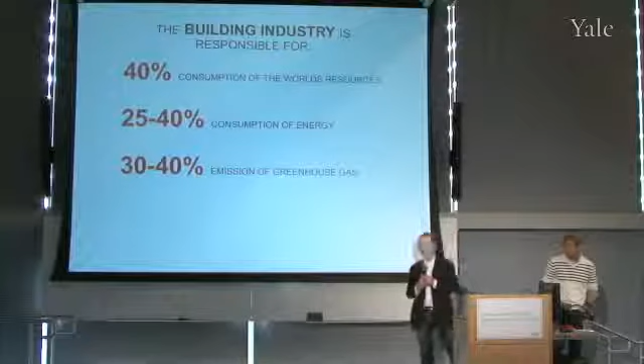So for this one here, 25 to 40% of the consumption of energy on the planet is from the construction industry, from the building industry itself. 30 to 40% of the emission of greenhouse gases is from construction. And 30 to 40% of solid waste generation.

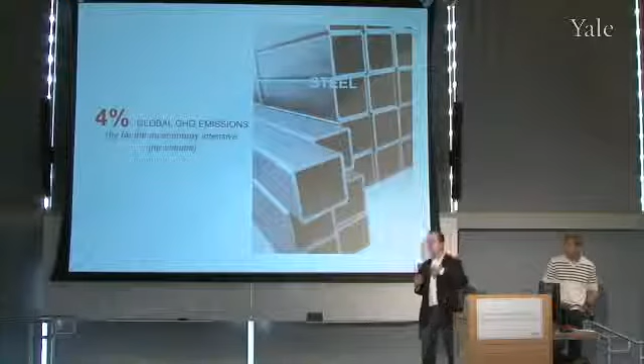Now, as we stand, the building industry itself principally uses concrete and steel for these buildings. Concrete itself is responsible for between 5 and 8% of global greenhouse gas emissions. So that makes it the fourth single biggest emitter of greenhouse gases. Steel for 4%. So per volume, in terms of the construction industry, the biggest emitter of greenhouse gases.

Now, this is compared, importantly, to airline travel, 1.6%, shipping 3%, and again, concrete 5%. So if you build in timber, you can fly where you like.

Get used to my humor.

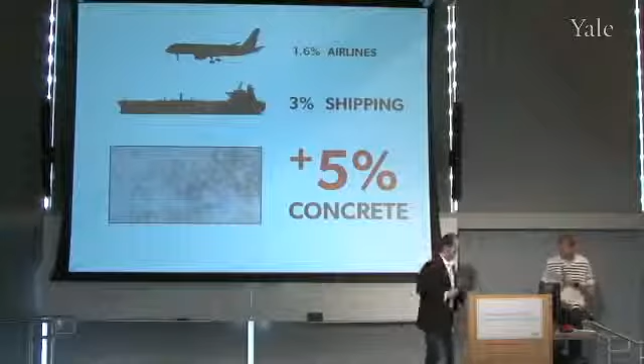So now we're going to switch over, and I guess this really is the essence of how both of us came to this discussion. I come from BC, where it's obviously a big timber industry, so it's an important discussion in my community. But my interest as an architect, and Andrew's interest certainly, is around the issue of climate change, around the issue of environmental footprint of the buildings we build, and looking for a new responsible way.

So much like Andrew suggested, the fact that the world is urbanizing at this extraordinary rate means that we need to not look at solutions that are rural or suburban scale, which much of the architecture industry has been looking at for a long time, of greener solutions. We really need to look at the big buildings we make. And again, the bones of those big buildings is really where we found we need to start from square one.

So effectively, in all those statistics, and to go one step further on the stats that Andrew just talked about, here in the United States, almost 50% of greenhouse gas emissions are related to the building industry, and almost 50% of energy is related to the making and manufacturing and operating of buildings. So those numbers are actually slightly skewed down worldwide as they are here in North America.

They're even more extraordinary. So obviously to us, the reality is that big problems equals big opportunities equals big solutions, and that's really why we've sort of stepped into the fray of very, very large kind of systemic change discussions about how we build in urban buildings.

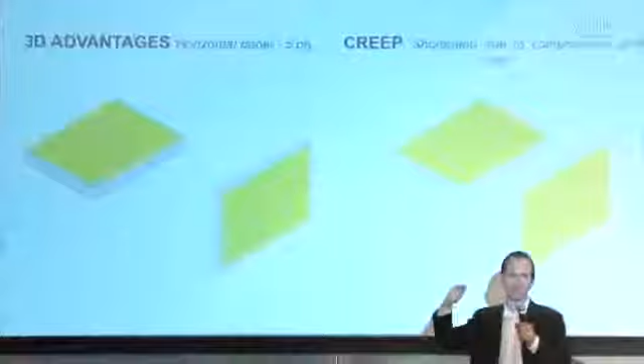So cross-laminated timber has the advantages of like a jumbo plywood, if you like, has the advantages of acting as a beam, that a wall will act as a beam. So the walls are carrying the load from across the length of the wall, and the floor slab will work in both directions. So you have the primary timbers on top and below, and that's your primary load path. And then the timbers in the middle will give you a secondary load path, which makes your slab stiff across the width.

In terms of moisture and stability, again, they're very stable materials. So we had a terrible thing happen about last summer, the end of last summer. It reached the dizzy heights of about 75 degrees in London, and we had one of the cladding panels pop off the building and fall onto the sidewalk. I want to say narrowly missing a baby, but that's not the case. So of course the developer phones me up on the weekend, running down there, and everybody's like, well, this is just because of the timber system, because of your timber structure.

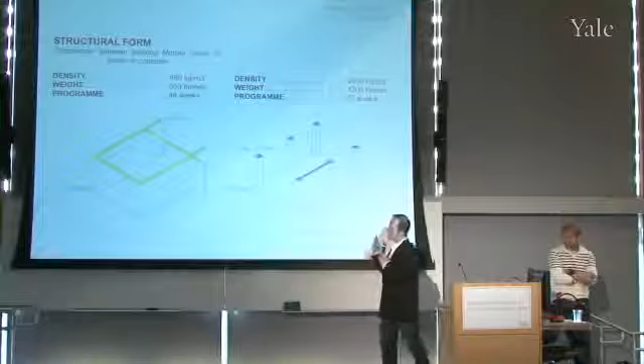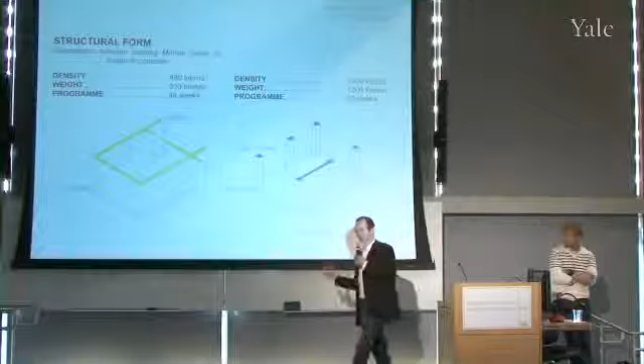So the sketch that we show our clients, that we discuss with the clients that come in, is to talk about this building instead of a slab and column building, such as you build in concrete, to talk about a panelized system, and that the weight of this building is a quarter of the weight of concrete. So that's the first thing we sit down and we say, look, if we're building a building that's a quarter of the weight of concrete, we don't need a tower crane. We can do the whole thing from the back of a truck with a mobile crane. We need about a third of the amount of foundations on this building.

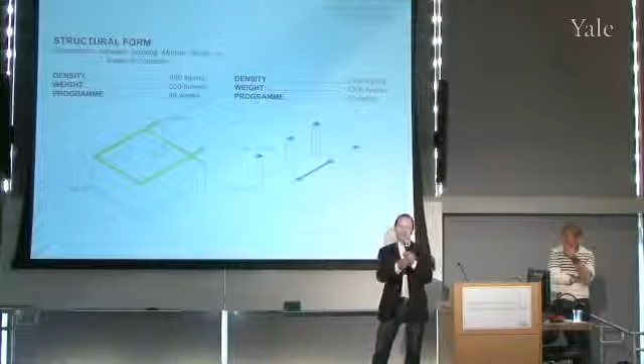And also, it's fast. It's a very accurate, very easy material to work with, and very, very fast. So we did a comparative program for the client, showing them a concrete frame building going up in about 18 months, and the equivalent timber building going up in less than a year. And in fact, from when we started demolition to when the first people moved in was 11 months.

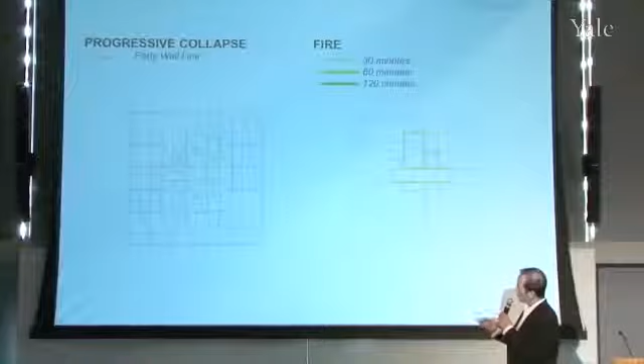So these are bedroom walls. And you can see this is the party wall in this situation. So this is one apartment, two, and this is a big 4-bed apartment here. So you can see how they're separated there. So we're able to move these party walls across the structure, giving us that varied plan, which allows us to change the building as it goes up. So we've got 5 different floor plans on 9 floors.

So in terms of fire, the way that it works in the UK is we have a system of compartmentation, which is where we separate out the apartments from each other by having a 1-hour fire separation between each apartment, and then a 2-hour fire separation on the lobby and the elevator shaft. So the idea is that if there's a fire in this apartment here, then this apartment's got an hour to finish watching what they're looking at on TV, and then to leave.

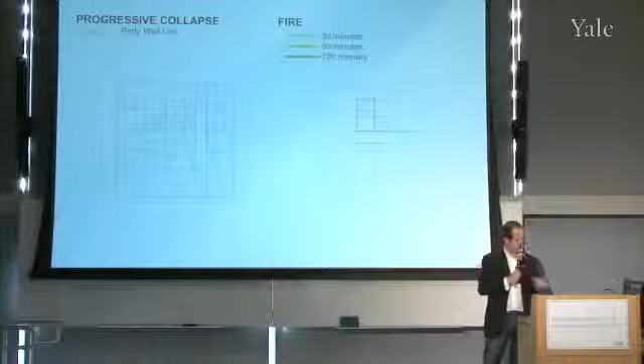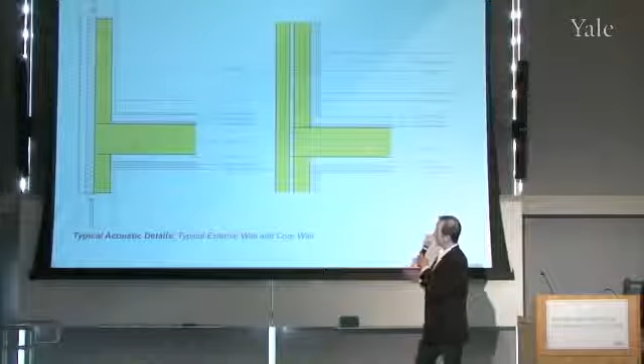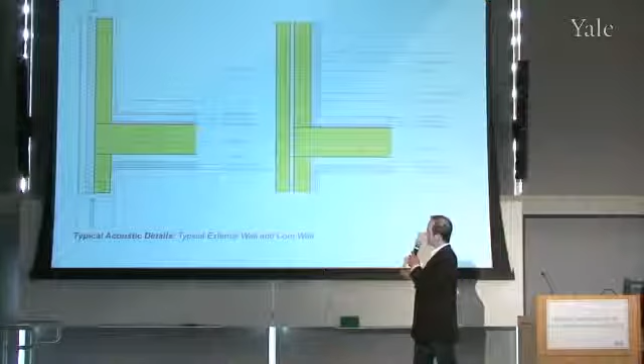So just in quick terms, I'm doing this quite quickly so I can give Michael some time to talk about the work that he's been doing. But this is a section through our building here. So this is the floor slab, which is a 6-inch timber slab, and then 5 inches for the walls here. And then we have an acoustic insulation that goes and wraps up the end there. And we have a screed on top, and that's for an acoustic separation, but also gives us a thermal mass as well. So we're able to put underfloor heating in this screed here. And then we have a void, insulation, and plasterboard below here.

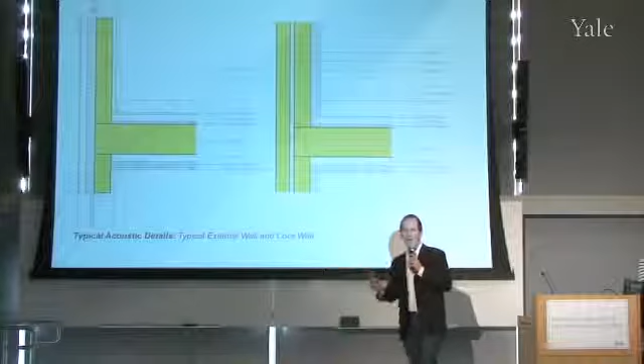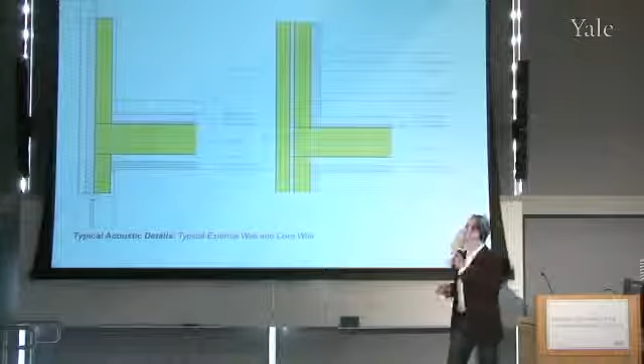On the outside of the building here, we have a breather membrane. What do you call that, like a Tyvek kind of stuff? So yeah, breather membrane. So a breather membrane on the outside of the building, and then we run a rail system down that, and we push the insulation on top of that, and then we have a simple rain screen cladding system on the outside, which is made from a wood pulp and cementitious tile. So very simple construction method. Hi, yeah.

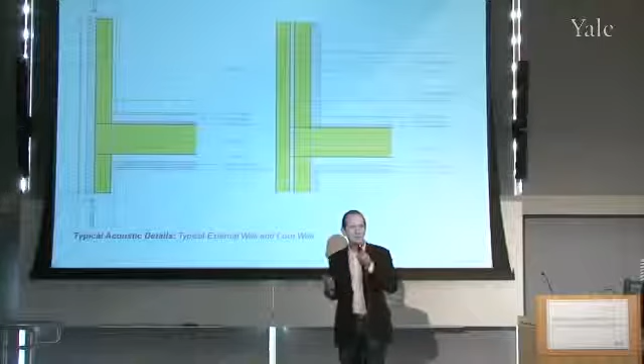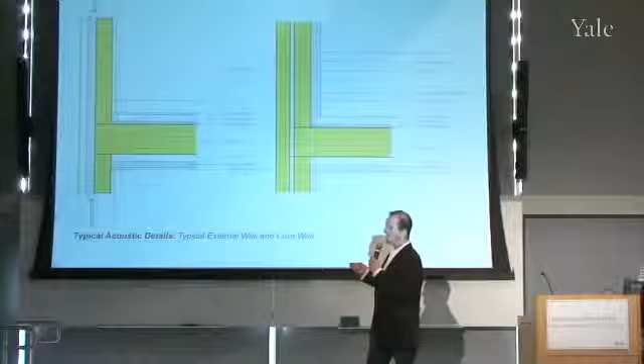That's it. That's not schematic. That's a construction drawing painted green. It's a platform construction. So the wall panels sit on the edge of the floor panels. But there's angles there, right? There's a little angle bracket that sits there, and then in localized positions we've got some screws that sit underneath the wall panel here, just for compression, for creep on the edge of the slab.

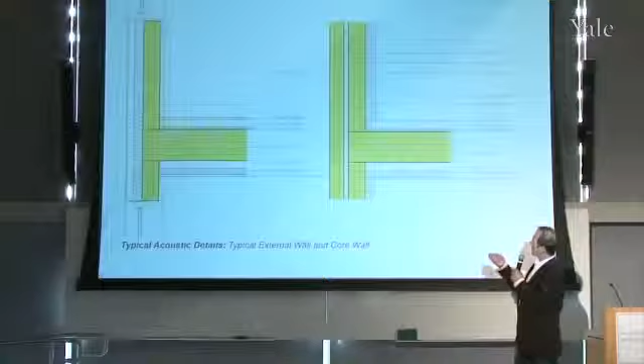But really, the whole principle was to make sure that the building was incredibly simple. The idea was always to get the building built. So to make sure that the building was very simple, so that there were no complications for the contractor, no excuses for the contractor to say, oh, it's just far too difficult a thing to do. So we made it very, very simple. You can see this is a section here through the lift shaft. So we have a separate panel here for the lift shaft, and these are the internal walls up against there. So you have just a 40 mil, a sort of 1.5" separation between the two.

So this should explain it. This is a better idea here. So this is the construction process. So this is our ground floor concrete slab. This is London here. This is my office over there. This is beautiful, isn't it?

So the process of construction was that on a Tuesday morning, a truck arrived with 4 Austrian carpenters and some panels on the back. And then on a Wednesday, another truck arrived. On a Thursday, another truck arrived. And on a Thursday night, they went home to Austria and were tucked up in bed. So they built a story in 3 days, Tuesday, Wednesday, Thursday, and they built a story a week. So in 27 work days, we built 9 stories. And you can see no scaffolding here. And that's the finished result. Can I just play it once more?

Is there any bracing needed during each level? No. Progress up in height? No. Bracing for stability or for shear? No, because all the walls are working. So all the shear forces, all the P delta forces, if you like, pass through the slabs, pass through the front elevation and down. Does that make sense? Because the connections run along the length of each one of the wall panels. So as you progress with the walls, you're starting from corner to the end of the next corner?

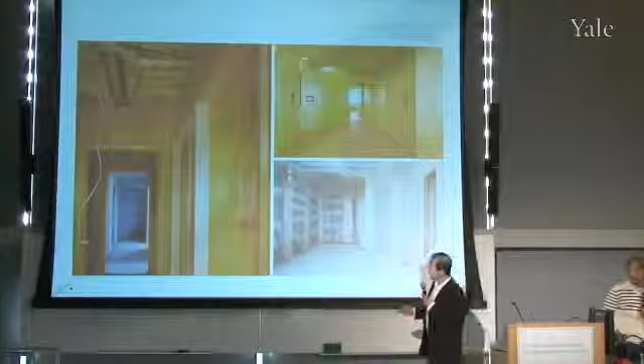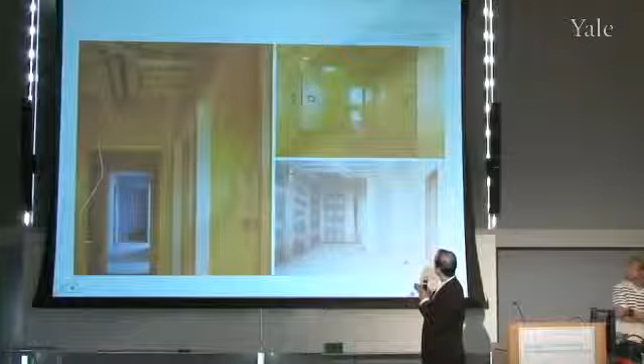So this is some of the construction here. You can see this is the first fix here running through for the electrics and for the gas lines. And you can see here the connections that we're talking about. So the whole building is put together using 3-inch galvanized brackets at 18-inch centers with 4-inch screws. So that's 3 guys with cordless screwdrivers and 1 guy driving the crane.

The discussion that we had with our developer client about the building was that when we sat him down and we explained to him the environmental and sustainable benefits of building this building in timber, he said, the thing is, Andrew, I don't give a monkeys for the environment. I'm not interested. You're going to have to sell this to me in a completely different way. So we sold it to him on the basis of speed and efficiency and cost.

We were cost equivalent to concrete, but we were 6 months quicker. So he said, okay, well, that's fine. We can go with a timber system, but I don't want anybody living in this building to know that this is a timber building because I'm worried that they won't buy it. If they think this is some kind of sustainable exercise, then they're not going to touch the building at all. So we said, okay, fine. We just want to build the building.

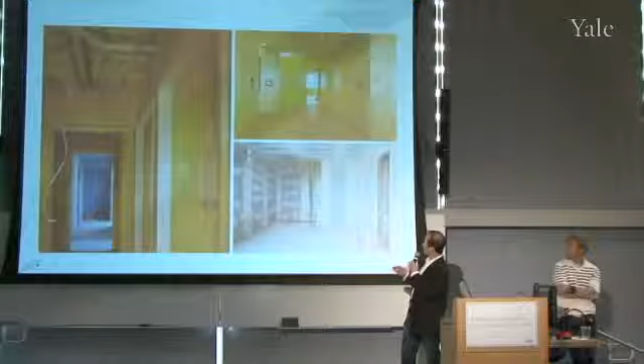So we covered the interior of the building with gyprock here, which at the time, when you've got the sauna sort of stage here, and then you go to this, it's a little bit heartbreaking. But actually, I think that in hindsight, what this has done is to strengthen our argument in terms of proving a viable alternative to concrete and steel. Because the viability of this building has not been about the aesthetic, it's been about the structure and the efficiency of the construction process. So that's actually worked very well in terms of being able to talk about timber as an alternative, using this building as an example.

So you can see here, this is during the construction process, and this is the end of the job. So we have here an inboard balcony, no cold bridging issues. We've got torch-applied felt on the balconies. So I came onto the building site, and you've got some Polish bloke sitting on the corner there with a blowtorch in a timber building, putting the felt on, which is a bit of a heart-stopping moment. So there we go, finished product.

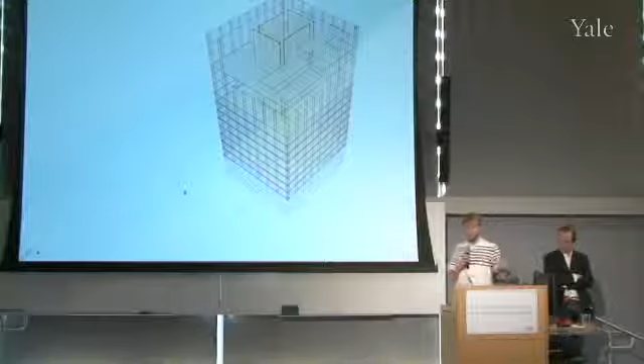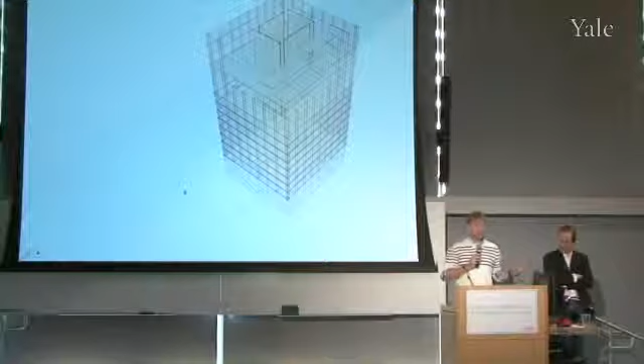We designed it very specifically around Vancouver, and we decided that our report needed to demonstrate that this was rigorous from a technical point of view, but also rigorous enough to show that it was cost effective and tell the story why consumers would want to buy it, why developers would want to do it, how people would ultimately market these ideas, and also obviously the other critical parts of how they worked and what their sustainable story really would be.

So in Vancouver, where I live, it's a high earthquake zone. We wanted to really challenge our system by proposing it in the highest earthquake zone in Canada, and also proposing it in a dense urban environment and really work with contractors to understand how we would actually technically build something on that scale.

So the system's actually remarkably simple. The first version of this I built with my son when he was 6, and we sat down on the ground together and put it together. Sometimes the best ideas are just that easy. And I work with some outstanding world-class wood engineers in Vancouver. I'm lucky. I come from a wood culture, and there's some outstanding wood engineers.

I've worked with the engineers of this building in New York, and my engineers in Vancouver actually have been helping the New York firm understand wood a little more. We have a great culture for wood. And when I pulled them aside, I said, guys, my son Macalo and I have been making this, and I really think this is interesting, and this has some real potential to build big, and what do you guys think?

And they sort of said, yeah, this actually works, and we started working on it more and more over the last 5 years until we reached this point where we realized that it's not only possible, it's actually really practical to do this, and it's shaken things up a little bit in the big conversation worldwide.

Because this just came out 2 weeks ago publicly, it's kind of an interesting moment for me personally and for our firm, because we spoke to CNN a week ago, and we're talking to Bulgarian newspapers, and some guy from Iraq contacted me about how to do this. So it's become a very quick and very instant conversation because it seems so different.

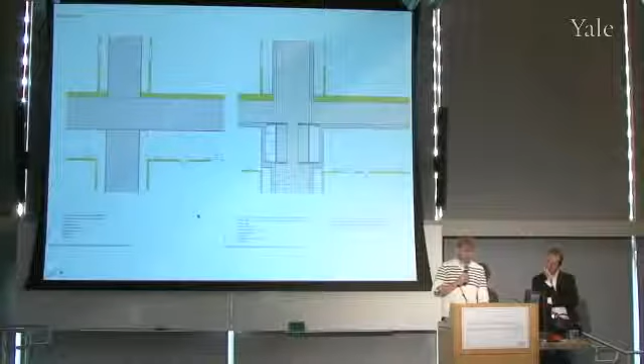So again, without going into any detail, what I just want to point out is throughout our study, what we were able to do is compare concrete to steel, to wood, constantly back and forth, show how they worked acoustically, show how they worked in fire, show how they worked from a building envelope point of view. And our study is filled with millions of these diagrams to really help articulate it. And one of the things that almost became a surprise to many people is that in concrete, a lot of the time we had thicker slabs or thicker walls than we would for the same building of the same height in wood.

And the reason is quite simple. Andrew touched on it. A wood building is 1/4 to 1/6 the weight of a concrete building. So when you're building in a high earthquake zone and you build in concrete, as you go higher and higher, the mass of the building becomes very great. And the forces that you're trying to resist are very, very great because the building itself is so heavy. When you do it in wood, you're actually resisting less force.

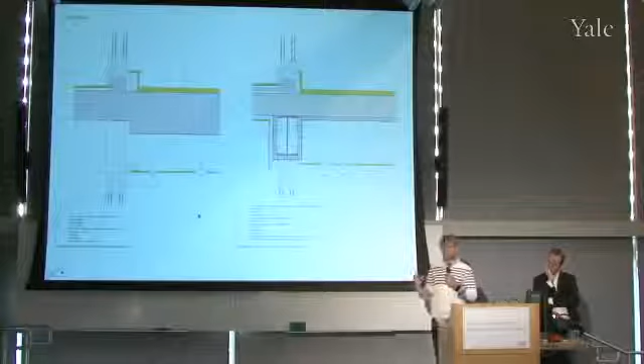And what we found in a building that's 12 stories tall, in Vancouver, you would typically see the concrete walls around the elevator shafts be 1 foot thick. And in wood, they were only 9.5 inches thick. So it was almost a huge surprise to us that wood actually resulted in more floor space and a more simple system. So again, we went through systems and how they were integrated, and we went through all the different conditions of balconies. We don't need to spend too much time.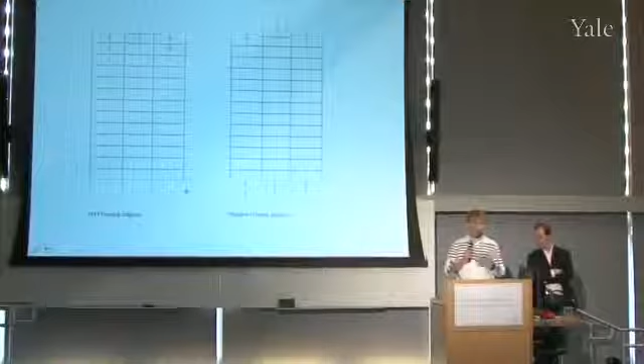And we wanted to check the boxes of the standard challenges. Currently, no building code has imagined these systems, so certainly the code is a big one, but really the issues are kind of consistent. Wood shrinks, and that's true, but when you build a very tall building, as wood shrinks as it dries out, the problem is you can have real technical problems with how that building goes together. In our system, if we built it on the right, the platform-based system where you build up to a certain height and then put a floor in, build up and put a floor in, it would actually result in adding up the floor slabs.

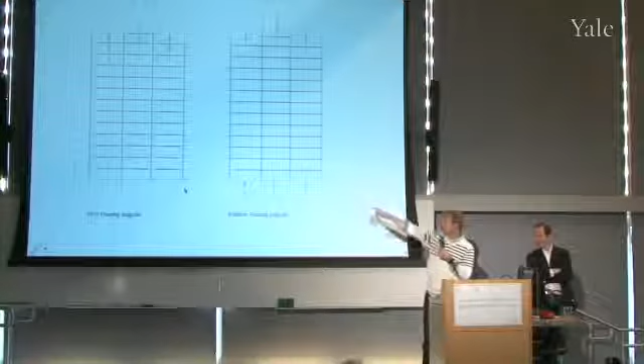And as you get very tall, that actually deals with a bit of shrinkage, although Andrew saw very little in his building at 9 stories. Once you're at 20 or 30, that can become a bigger issue. So what we've been working on is a system where the floors actually sit in between and we don't absorb the shrinkage. And so it's really effective. In fact, it shrinks about the same amount as any concrete building would. So that solves some technical problems.

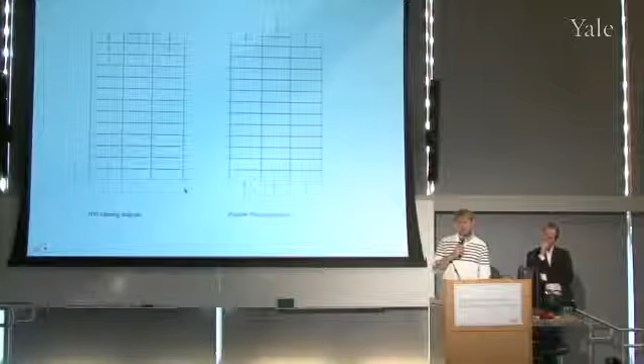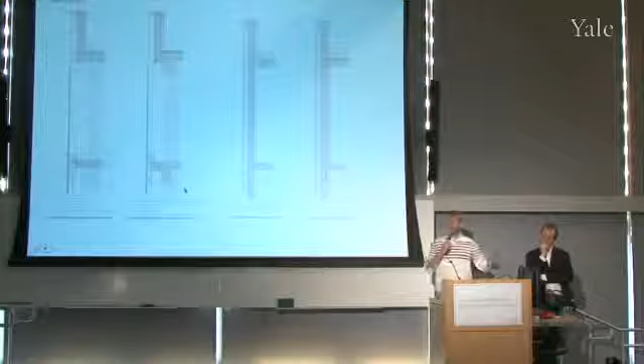I'm just going to keep going a little quicker now. So from a moisture point of view, just like in Murray Grove, in Andrew's project, we don't put the wood structure out there for the weather to beat it up. There's always an envelope that protects it, and that's a really important thing. I'm slowly learning all the issues that are the buzzwords for the public that write underneath the CNN article, all of their kind of concerns and complaints, and they're good comments. They're very standard comments, but there's also a lot that's just misunderstood, and there's no intention to build these things and have them sit out in the weather and rot and be exposed to termites and so forth. Those things are all taken care of.

Acoustics is the biggest issue. Probably the hardest issue of all the things we dealt with is just that in a big building, the mass of the concrete actually is very effective at dealing with acoustic issues between suites in a building. And getting these buildings to work is very possible, but it also requires some pretty sophisticated detailing.

And from a fire point of view, and Andrew touched on this a little bit, we have two systems. Big, tall buildings in North America have to resist a 2-hour fire. And what that means is whether it's steel, concrete, or wood, they have to stand for 2 hours so that people can get out of the building safely, firefighters can go in and fight the fire, and also the building doesn't collapse during that time and damage property or kill people down below it. That's just the way the codes work, and to deal with that, we had to prove that we had an answer for 2-hour fire rating for a tall building.

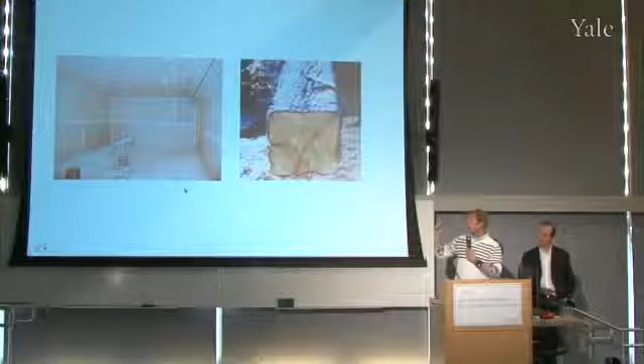And the way we do that, there were two options. One is that we just cover everything in 2 layers of fire-rated drywall, and that creates a 2-hour fire rating with some very specific technical details of how we do it. And that's called encapsulation on the left. But the other that's more exciting, and for us in Vancouver, the building code authorities are really interested in, is something called charring, where we actually calculate the thickness of the wood on the outside that will burn over 2 hours. There's different calculations for it, but it's roughly 0.6 millimeters per minute. If you calculate that over a 2-hour burn, it's going to be about 2.5 inches, 2.75 inches of wood that you will lose.

And that assumes your sprinkler system didn't turn on in pretty much catastrophic conditions. As long as the meat of the material left over after that burn is strong enough to hold up the building, you've satisfied that 2-hour fire rating. And our codes in Canada, and I think here as well, around heavy timber buildings like this have understood that for 100 years. And so because of the nature of these big panels, that's how we can solve fire at a large scale. So that's the sort of standard burn. In some parts of the world, which is fun, we actually protect steel construction with wood construction, which just goes to that counterintuitive reality that we need to change people's perception of wood.

And really, ultimately, this is where we're at right now. We're at that next step of building it. And within the next few weeks, I'm hoping we'll announce in Vancouver that we're going to build a 20-story wood building, which will be the world's tallest for now. And hopefully somebody beats us real soon. Maybe it'll be Andrew in London. I think that's it for now.

So maybe we'll jump to questions. But what we also have are some other example projects. So if you guys are interested, we could also show you some of our work, some of the places we're using, playing with these materials. Maybe we'll pull that up, and at the same time, you guys can ask questions. Anybody got any?